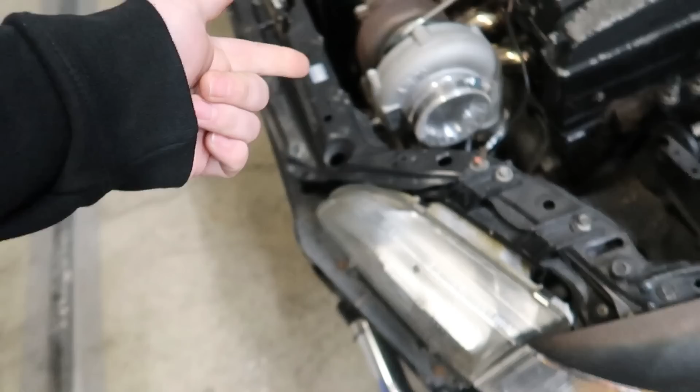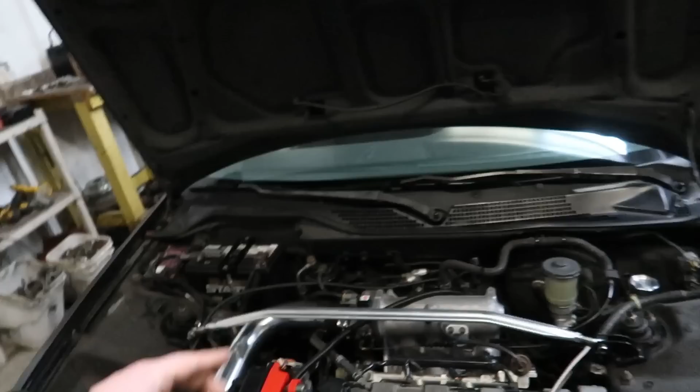We got some injectors installed in the last video and a fuel pump. I also put a Speed Factory 4-bar map sensor on it that he had in the car, and I got my dyno wideband and stuff all set up ready to go.

But first we're going to take the wastegate off and check the springs inside of it, because when he dropped the car off, he mentioned to me that he put all the springs in the wastegate. And this is a stock B18B. I don't know how much boost we really want to make on the stock motor.

It's on E85. We're going to try to make some good power with it, but at the end of the day, we want to be smart and not shoot for the moon right away. If we have all of the springs in the wastegate, it's probably going to make like 18 or 20 pounds, which might be cool, and the motor might take that. It probably will take that, but this is his first turbo car, and I think if we set him up with like 350 horsepower, it's always a good place to start with your first turbo Honda.

I think if you jump into like 400 horsepower right away, it can be a lot, and you can't appreciate the build up to power. One of my first turbo Hondas made like 200 horsepower, then my second one made like 250, then my next one made 300, then the next one made 400, etc.

It keeps the excitement in the car, building and making it better, because that's what this hobby is about. At the end of the day, we want to continue growing and improving. If you just jump into 400 or 500 horsepower right away, you can't respect the build-up, if you know what I'm talking about guys. So that's what I kind of believe in, you know.

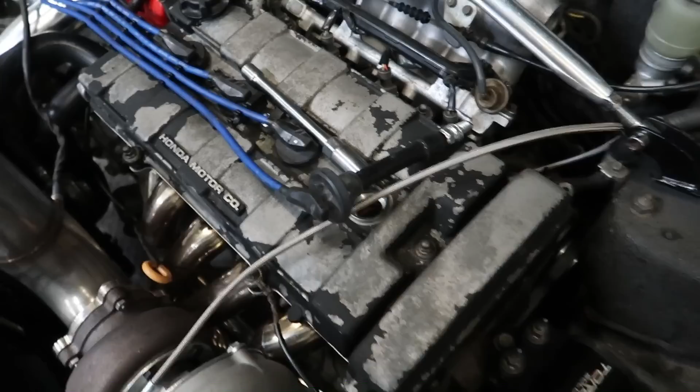Alright guys, so we got the little EG on the dyno. I got it all strapped down, and I just pulled the spark plug out of it to check and see what's in here. Unfortunately we have a heat range 5, a stock spark plug that's in here currently. So we're going to swap those out for a set of NGK BKR 7s.

So we'll throw those in, and I'm going to leave the wastegate for now, because I think this guy wants to make like 350, and anything more than that he'll be happy. I just don't really want to push it on the stock motor, but we're gonna play it safe, see what kind of boost it makes, and go from there.

I have the boost cut at 15, and I'm gonna see where it levels off with all 3 springs. I think because these gates come with a 4, 6, and an 8, depending on the setup, it will make a little bit less or a little bit more than that. With this thing being sourced right from the turbo to the wastegate, and a pretty good manifold, I don't think it's actually going to make a ton of boost, but we'll find out.

I did just drive it on the dyno and got some of the cruising figured out on the tune, and I can already tell that this thing is going to be pretty lazy. The turbo is quite large for this non-VTEC motor, especially only being able to rev about 7 or 7,500.

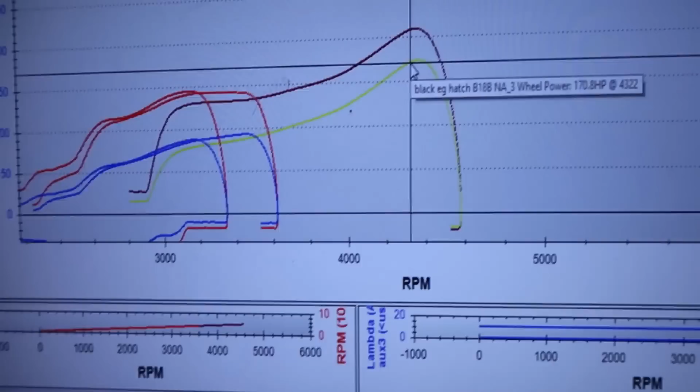It's already making 170.8 horsepower at 4,300 RPM, so this is the power curve currently. I've got to swap the spark plugs before we go any farther, but I don't think it's going to make peak power till way out here, 5,500 or so. So it's only going to have about a 1,500 RPM power band, which is unfortunate.

Maybe he'll switch up the turbo and go to something smaller later, just so it's a little bit more responsive. I always tell you guys, don't over turbo your car, but he got a good deal on this setup, so he just threw it on.

But with like a 58, or even the 40 or 50 — I think VS Racing now has like a 52 or something — that on this thing would be super fun. Especially on a non-VTEC car, you kind of really want that turbo response, and I don't think this setup's really going to do that. It should still make power, but for a small amount of time. And a small turbo is still going to make the same amount of power — it's just going to make it for a longer period of time.

That's why I tell you guys don't over turbo it, because you could make this kind of horsepower with a much smaller turbo on the same boost. That's a kind of big misconception, and I might piss people off saying this, but if your turbo is not capped out and it's not creating back pressure, a smaller turbo is still going to make the same horsepower, or very close to it, as a larger unit, if the back pressure and everything else — temperatures, etc. — is the same.

I plan on doing a test, maybe on my single cam car or some other car, where we actually compare on the dyno what a smaller turbo makes versus a big turbo. We'll literally do a turbo swap on the dyno and show you guys it doesn't really make a difference until the small turbo's capped out, if that makes sense.

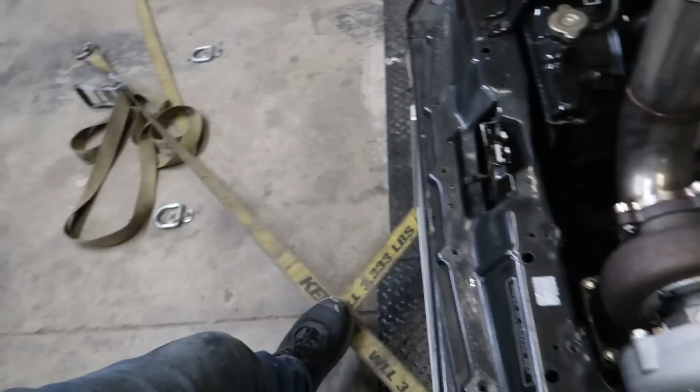And give it another go. But I'm sure when this thing actually lights off, it's going to come in aggressively, so we've got to watch the tires here, make sure that we're strapped nice and tight. I think the gate was opening, but it was spinning, so I don't think it was able to really build the boost. So let's try it again and see what we can do this time.

Starting to come into some power now. That was about 6,400 I saw. And another thing I forgot to mention, we just made 319 horsepower, so that's pretty awesome. 320 horse and 312 foot-pounds of torque. This is about 13.8 pounds of boost.

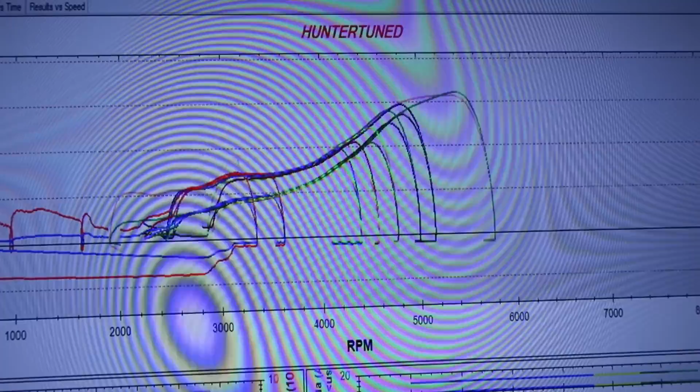It's not quite peaked yet, but I forgot to mention, this guy told me this has a stage 1 clutch. So I think maybe the first couple pulls I was doing, the clutch was slipping. But it seemed like it started to grab around 6,500. So I think if I just stay in it a little bit, it should hold, and I'm hoping we can make a little more power.

We should be able to make like 350 out of about 14 or 15 pounds. I kind of gambled on this wastegate spring setup, but I figured this thing would make what I wanted with the springs he had in there. So maybe he did a good job and saved me a little time by springing the gate up to make his power goal. But he might need to put a clutch in it, because with this kind of torque, I don't think that stage 1 clutch is going to be rated for it.

But yeah, I'm going to do another one. Air fuel was beautiful, it was a little rich coming into it. I might lean that out a little, and then we're just going to try to spin it up to almost the rev limiter at 7,000 RPM and see how it does then.

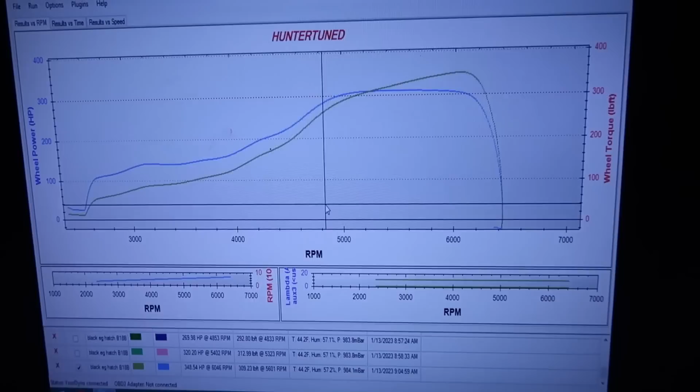Let me show you the power curve here once I get this stuff cleared out so it's a little easier to see. So this is what we're looking like currently, and honestly, not that bad. I feel like we could rev it a little higher yet and make even more. That was about 15 pounds of boost.

And it's making some good power, guys. I'm pretty happy. It did have a rich spot going from when the boost kind of snapped in, so it would build 6, 7, 8 pounds, and then it would snap to like 14 or 15 pounds. That transition spot on the map I have to adjust, but other than that, it's running pretty damn good.

I'm pretty excited. So not too bad for a non-VTEC motor, but this thing made like 170 or something all motor.

So 14 or 15 pounds, I mean, we're pretty much exactly where we should be. 14.7, we should be double naturally aspirated horsepower. If you guys watch back, this thing made, I can't remember exactly, but it was like 170 or something to the wheels, which at 14 pounds, 170 times 2 would be 340. So we're right there, 350, and we're like 14.98 pounds of boost, I think the data log said. So yeah, we're like right on the money.

That just shows that this setup is efficient and it's not really choked up. Obviously it's got a top mount and an up pipe. Here's our max boost, 14.3.

Yeah, and this transition over here is what I was talking about, that's what I was trying to work in. I had it really rich up top because I didn't know how much boost it was going to make. So I have to smoothen that out a little bit, and that's about it.

I was going to show you guys the dead times I'm using too. I do have to adjust the idle on this car because it idles at like 600 RPM, and it doesn't want to start. Yeah, and this guy's got like a safety chip or something in here that he said falls out sometimes.

I've got to definitely set the mechanical idle a little bit higher on this thing. Once it's running, it's fine, it'll come back down to idle... maybe not. Yeah, I definitely have to fix that. Man, this thing sounds great though.

Yeah, it's barely idling, like 300 and it's surging up to like 800, so I definitely have to fix that. But after a pull, it was running on the log at 650 RPM and it was idling good. To get it to idle a little bit smoother, we're gonna bump up that mechanical idle a little bit, and this thing should be all set. I'm gonna do probably one more pull and we're gonna see if we can crack 350. But this thing's turning out pretty awesome actually.

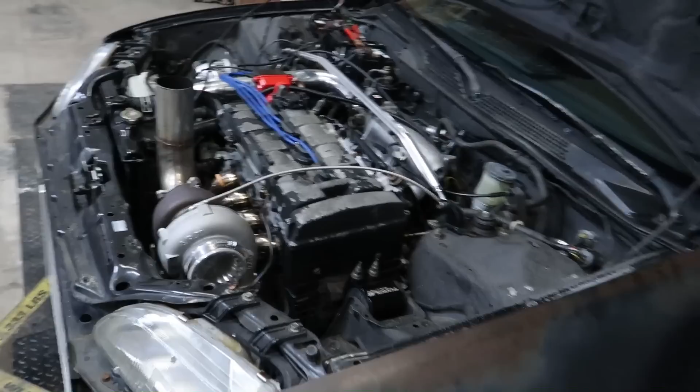That was about 6,900 RPM. This thing definitely needs an oil catch can, it doesn't have any venting on the motor, so it would definitely benefit from one. You can pick one of those up at huntertuned.com along with your new wastegate and blow-off valve.

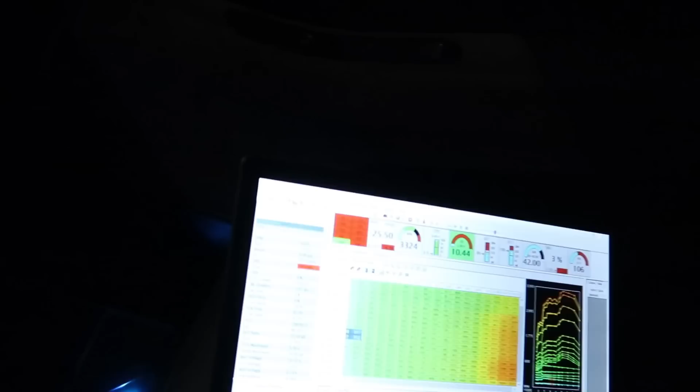But this is what I'm talking about - once you do a pull and stuff, the thing idles really low. I'm just gonna show you that I'm gonna have to bump up that mechanical idle. This is also the data log from that run. You can see our peak RPM was like 6,800 and our peak boost was like 14 and a half. 198 degree coolant temp, 85 degree intake air. Everything looks good there.

What was I gonna show you guys? Oh, we're gonna connect here and I'm gonna show you the RPM this thing's idling at right now. 600.

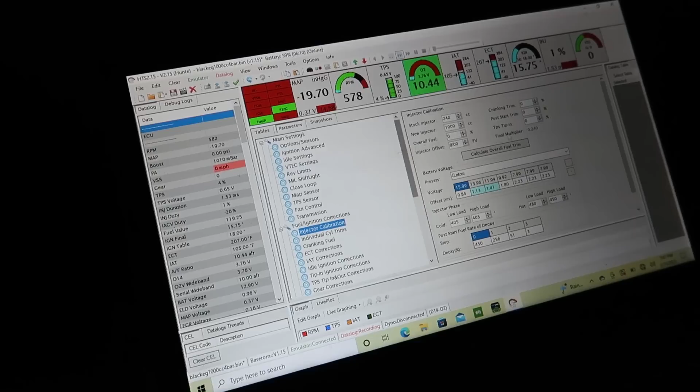Look how steady the air fuel is too, that's pretty cool. I was gonna show you guys dead times on the Hunter Tuned injectors. These are the times I'm using for HTS on the thousands. They seem to work out okay. But every setup's a little different, and sometimes I actually play with dead times because a machine will spit out a certain dead time, but a car might want something a little different. So sometimes I do play around with them a little bit to get this thing to do what I want it to.

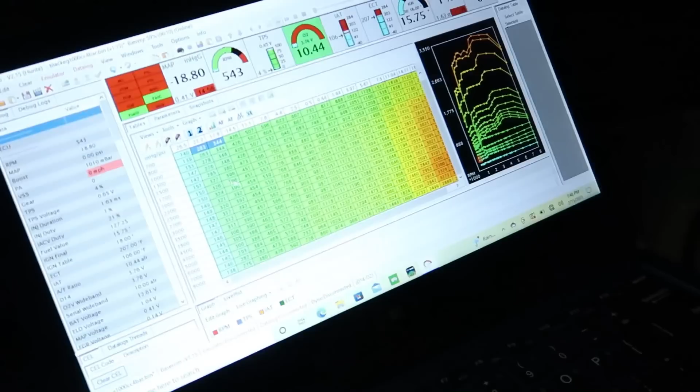But you can see here that our map is nice and smooth coming off idle, and everything in the cruising area is actually really rich right now. So if we brought this back down, it would pretty much match idle. And that's kind of what a lot of guys wonder about - if their idle area is really rich or really lean, they get upset about it. I don't know why, but that's just how it is. This one's a little bit lower than the rest of the map for idle, but you know, big injector stuff. I don't know what I'm saying.

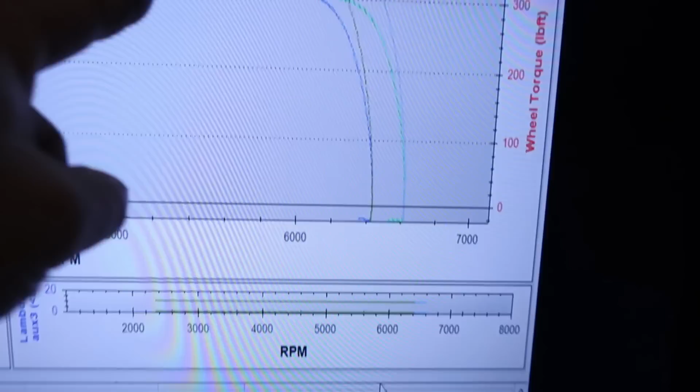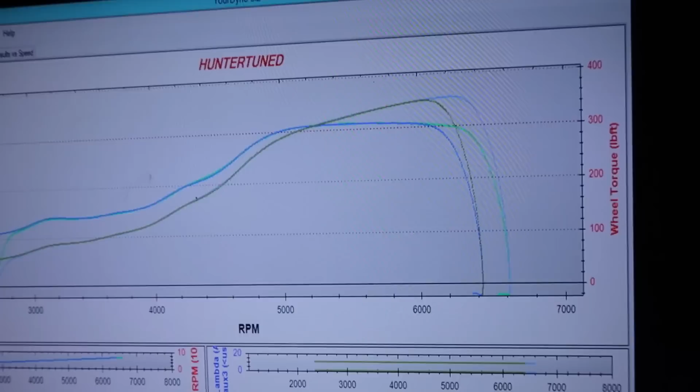But yeah, let's see what that last pull just made for power. I'm really kind of curious, because I bet you this thing just made like 360. Pray for the clutch. I painted the exact same picture here - you can see that it just went a little bit higher because I revved it a little bit higher. The dyno might be off just a little bit RPM wise, but I saw 6,800 on the data log, and we just made 353 horsepower, 310 foot-pounds. So not too bad of a power curve.

It could be better - if it had a smaller turbo, the peak torque would be down here, but it's still not too bad. This guy should be really stoked with this, and it's probably gonna blow him away. This thing's gonna burn all through third gear, and hopefully make him smile. So, but that's gonna be it for now, guys.